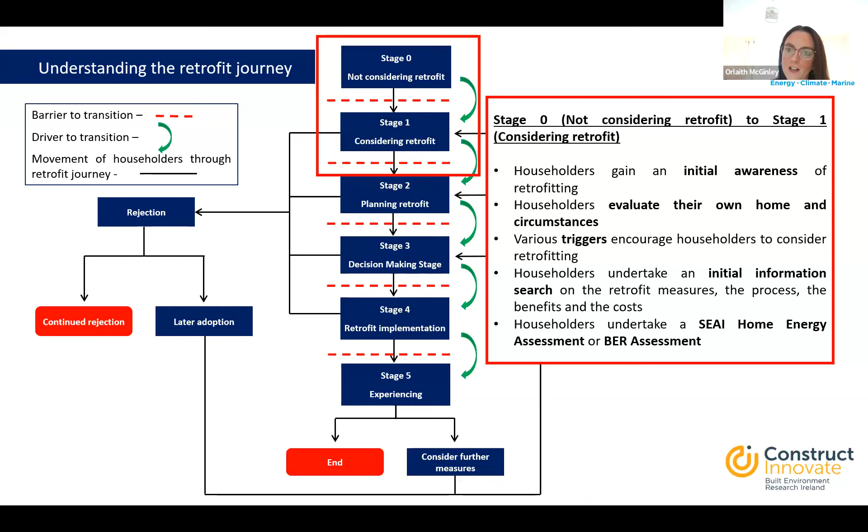Some reasons people might first consider retrofitting: householders are likely to consider retrofitting as and when they feel they need it. This need might arise from dissatisfaction with the poor conditions of their dwellings, maybe emergency repairs needed to some systems or components. They might feel they need to retrofit due to various conditions of domestic life - imbalances between the home as it is and how it could be better adapted to meet their needs, the changing demands on their dwelling, and the physical ability of householders. There are various life stages at which a householder might consider retrofitting - for example at retirement, on the purchase of an existing dwelling, or where other non-energy renovations are also taking place.

They might also consider retrofitting as a result of the benefits for the indoor environment - thermal comfort improvements, indoor air quality improvements. They might look for the health and well-being benefits of retrofitting. It could be the economic benefits, so the energy cost savings or property value improvements, for example. Or it could be the environmental benefits in reducing their greenhouse gas emissions.

Householders might consider retrofitting because they've gained more awareness and knowledge about the situation - more aware and knowledgeable about energy and environmental issues, or about retrofitting and its benefits. Householders who have learned about the presence of one-stop shop supports might see that as an attractive opportunity, or they might see the available grants as a good situation for them to consider retrofitting from the start. They might find they have higher trust in retrofitting, in that it's a government-backed initiative, and that SEAI provides registered providers for the works.

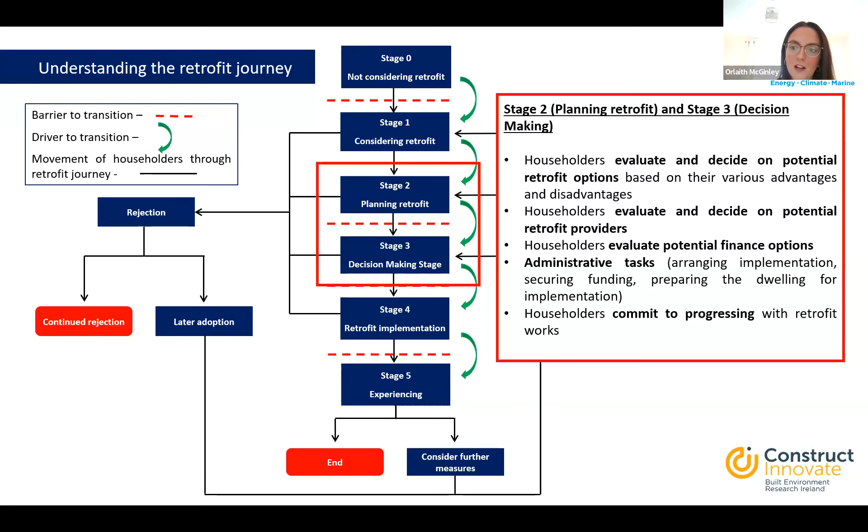Some of the questions people might ask at the planning and decision-making stage centre around: Can I afford to do it? What measures should I go with? How deep will I go? What grant route will I take? How long is it going to take? Is it the right time for the home to do it? How will I fund it, or how will I finance it? What are the benefits? Is it worth it for me? And who will do the works?

There are various influences on the individual measures that people might plan. It might be others' experiences with retrofit measures, peer recommendations. Costs become even more important when householders are at the planning and retrofit decision-making stage. There might also be household dynamics and differences in opinions between what householders believe they should do.

It might be that the grant scheme requires certain measures, particularly for the one-stop shop service, which requires the B2 retrofit, and that might influence the plans that householders make. It might be what's technically feasible, or how much grant is available for certain measures, that might influence what people include in their plans and decisions.

It might be to do with the quality of the information available on the benefits of each measure. Again, it might be economic benefits, energy cost savings, property value improvements, how that differs across different packages. It could also be social benefits to do with improvements in the indoor environment, or environmental benefits.

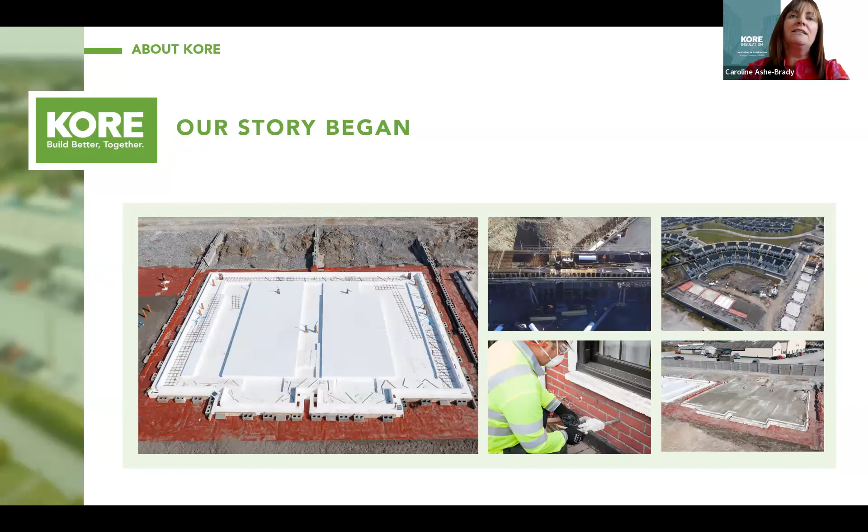Our journey began manufacturing, and as we started supplying materials into the retrofit industry, we saw an opportunity to look at the installation side of it. So now we are one of SEAI's one-stop shops. We were the first registered one-stop shop in Ireland. We work on the Better Energy Community Programme, we're also a contractor on SEAI's Warmer Homes Scheme, and in the last couple of years we've started taking our work into Northern Ireland, where we're an approved contractor with the NISEP. So we have over 10 years experience in retrofit.

Our first big journey into deep retrofit was probably 2017, with SEAI's deep retrofit pilot scheme, and boy, did we learn on that journey. We did a number of jobs that year, very complex, big, massive projects, some of them old buildings, some of them with extensions, and we learned a lot. So I'm going to try and share some of our learnings when you're thinking about and talking to your clients, or thinking about it yourself.

Look, Orla's already spoken about the different grant supports that are available, but really there are three routes. It's very simple. You're either going to qualify for the free energy upgrade, you're going to try and manage individual upgrades yourself, or you're going to be thinking about a deep retrofit, which is the route with the one-stop shop.

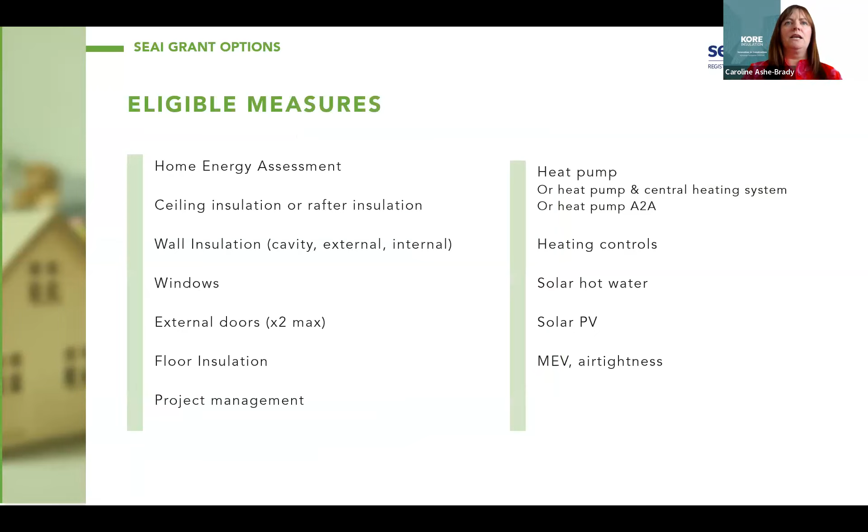I won't labor on this - Orla's already gone through the eligible measures, and for anybody who wants more detail afterwards, these slides cover grant eligibility.

The grant eligibility rules - there are some things to think about when applying for a grant. You cannot commence any of the works before you apply for your grant, that's really important. But if you're doing building or extension works, you can start the extension before you put in an application for the grant - it's the costs associated with the grant that cannot happen ahead of the grant application date. So if you're putting on an extension, don't order or pay for your windows until your application for the grant goes in. The grants can only be claimed on eligible costs related to the measures being done in the house.

You must achieve a post-BER uplift, and I'll explain that in more detail in a moment. All subcontractors must be registered with SEAI - so that's not bringing in your mate Johnny down the road or Paula or whoever, they have to be registered, and that has to be proved to SEAI.

When you apply for a single grant measure, they will ask you to choose who your contractor is. Now, it can change after the fact, but the reason that's in there is so people fully understand that the contractor must be on SEAI's list. No second-hand products can be used. You cannot have previously received a grant on the same measure.

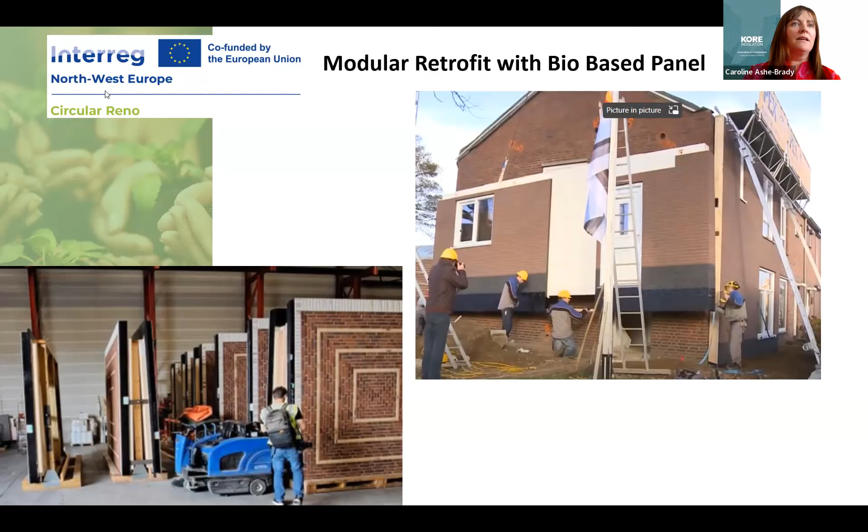...and we could produce a product from that, using those products to create off-site wall and roof panels using bio-based materials for retrofit applications. Quite the challenge. The project has started, but I'm showing you this to see that there's so much happening in retrofit. It's tied into what's happening in the new build section around our move towards embodied carbon, operational carbon, and bio-based products. It's an exciting project that's happening for us, and if anybody wants to learn more about that, we'd be delighted to tell you about that.

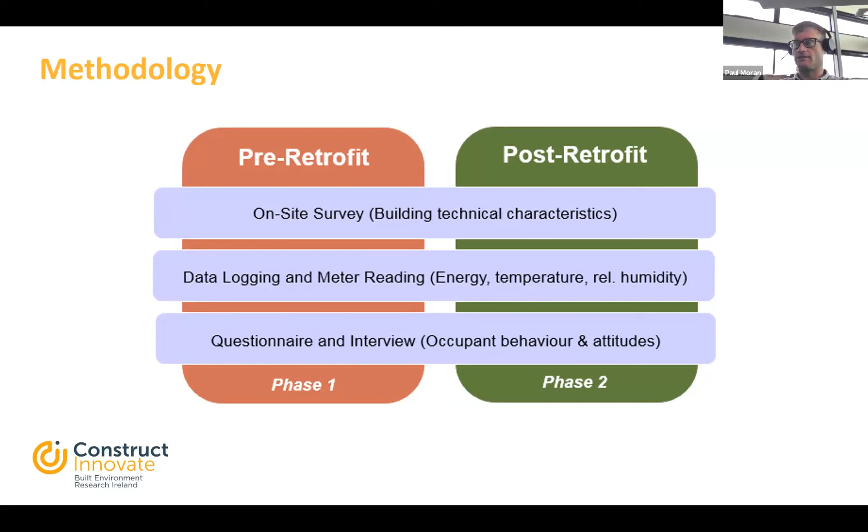So the case study buildings were essentially 2 different types. The first were buildings constructed in 1994, consisting of end terrace and mid terrace housing, with solid walls that had dry lining on the inside, and a small section with an empty cavity on the outside, located in front of the living area.

These are gas heated homes with timber windows installed. As part of the retrofit works, they got 300mm attic insulation, the cavity walls were pumped, they each got new windows, new doors, a new gas boiler system with heating controls, and then a new hot water tank.

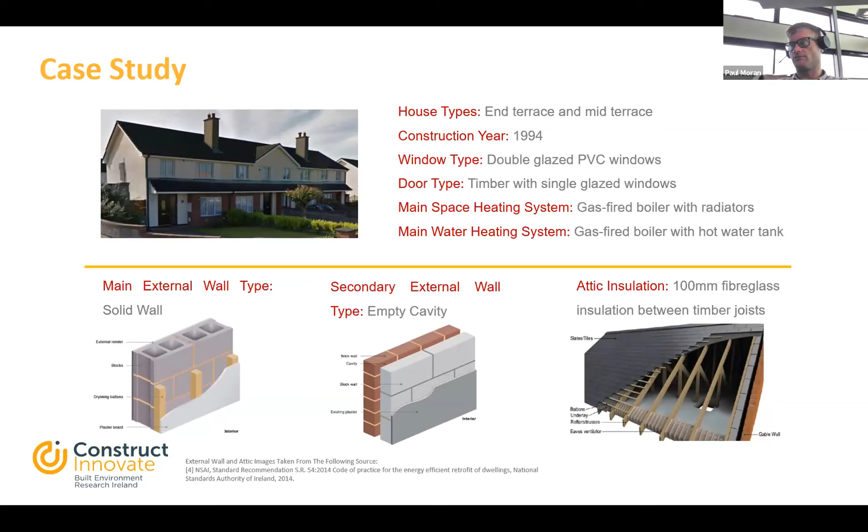The aim of these works was to improve the indoor conditions and energy savings of the houses, because the occupants said the houses were very drafty and that they struggled to retain heat after switching off the heating. So the hope with these works was to help improve those issues for the buildings themselves.

A standard floor layout for the mid-terrace and end-terrace houses has the living area and kitchen on the ground floor, and 3 bedrooms upstairs along with the bathroom. As well as that, there was a second part of the estate constructed in 2000.

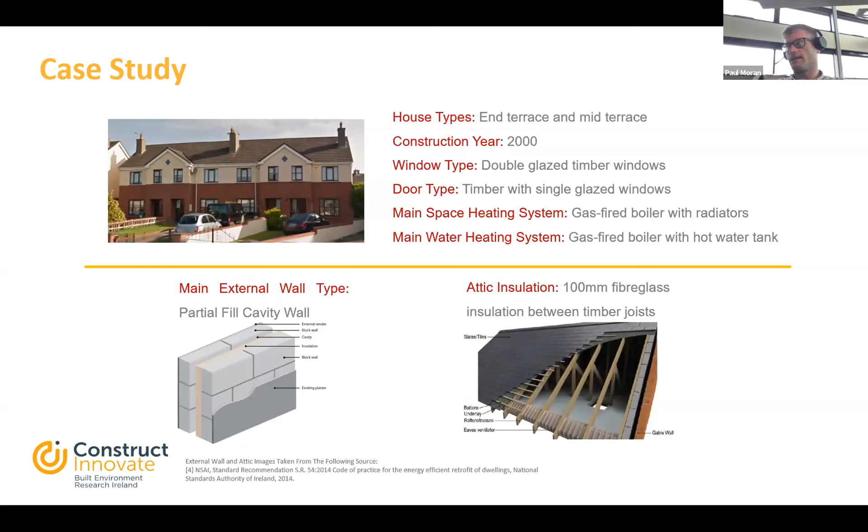These were partial fill cavity based houses, again mid-terrace and end-terrace houses that were gas heated, and they got similar retrofit works to the previous houses with new windows, new doors. The walls got pumped with cavity insulation, 300mm attic insulation was also added, and then a new heating system as well.

Again, similar complaints to the other houses in that they were very drafty. There was mold around the window reveals, and they tended to lose heat immediately after the houses turned off the heating.

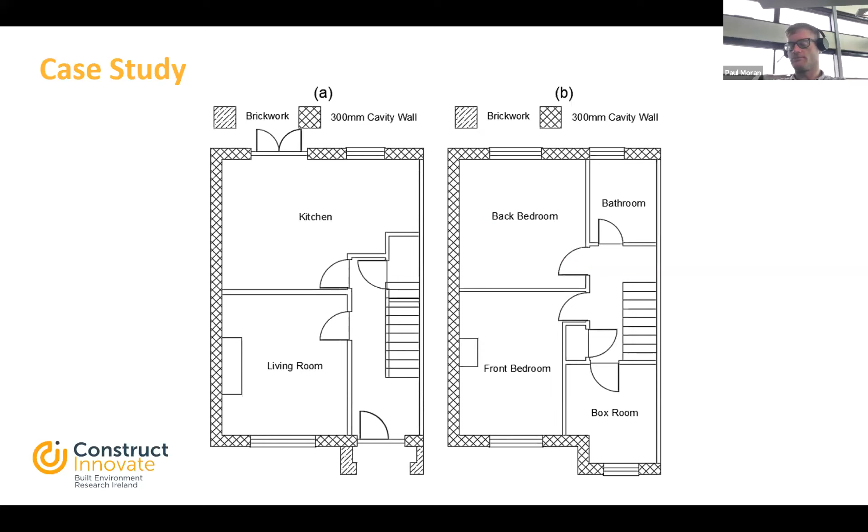As well as that, the box room was a big complaint for these houses, because they said it was very drafty, and they felt a lot of that was coming from the porch area underneath, where drafts got up underneath and into the box room itself, causing the temperatures to be really low in those rooms.

Even though buildings had similar technical characteristics, the occupants inside those homes can have a big impact on the energy usage of the buildings themselves, whether they were high energy usage people or low energy usage people. Because everybody used their houses in different ways, people experienced different benefits from the retrofit works. The high energy users tended to see more energy savings, while the lower energy users tended to see more temperature improvements within their homes.

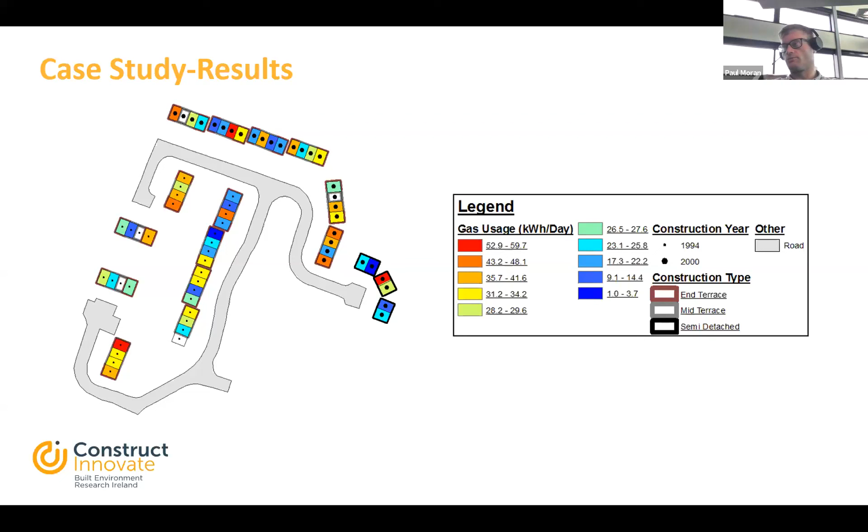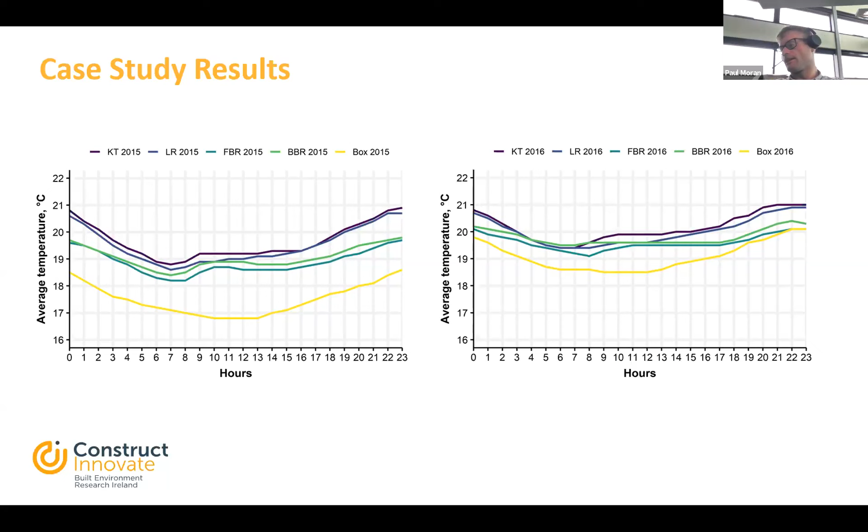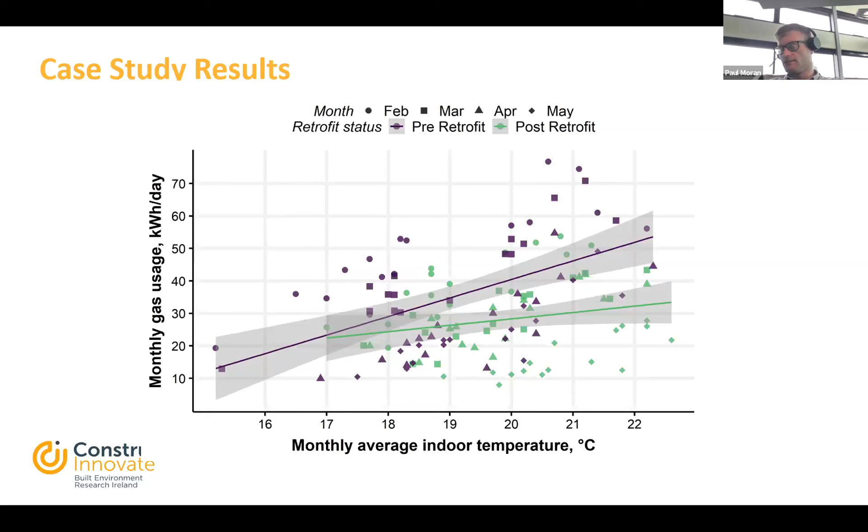Overall, the houses were able to achieve 11% gas savings as part of the retrofit works, as well as experiencing temperature increases. The level of increase depended on how they used their homes pre-retrofit. It's important that when people get their homes retrofitted, the benefits they want to see go in tandem - if you want to increase the temperature levels of your home after retrofit, that's going to eat into the amount of energy savings you can see.

But it's important that these kinds of studies are carried out at the same time, to help us identify any issues as part of the retrofit works that can improve processes going forward, and also to give householders that evidence to show them it's actually worthwhile doing these works, which it is. Happy to take any questions on that.